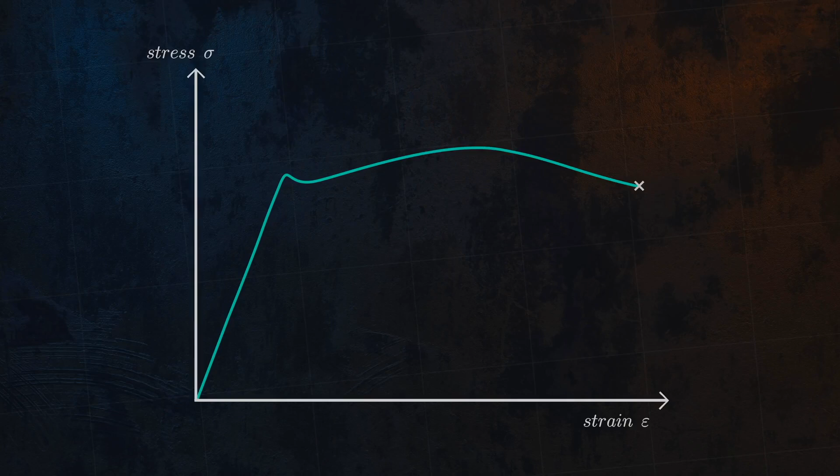As you know, I am discussing with you the course Material Science, and in that I am discussing a subpart, that is mechanical properties of materials. Till now we have discussed up to the hardness property.

Today we are going to discuss a very important thing which is known as fatigue. What is fatigue? In general sense, like a human body, when it gets tired, we say that we are fatigued. Similar is the case with different kinds of materials also.

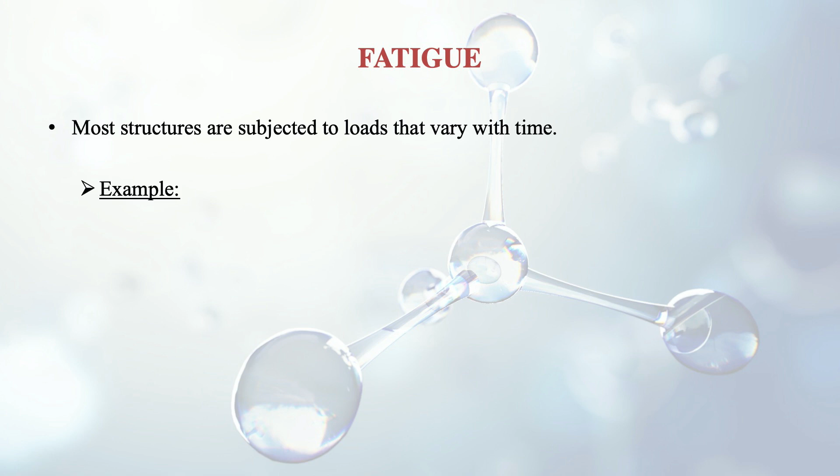Most structures are subjected to loads that vary with time. So it's a dynamic kind of thing. Dynamic means the time factor comes in. Like you have the aerodynamic loads, the wind loading on the buildings, the earth resistance to earth moving machines. All these kinds of loads are dynamic loads which keep on changing with time.

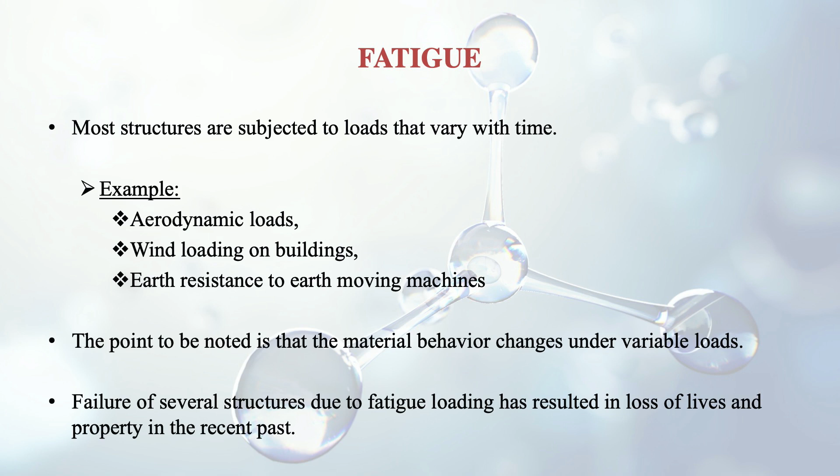The point to be noted is that the material behavior changes under variable loads. Different kinds of properties of the materials and their behavior change upon the variable loads which are varying with time. Failure of several structures due to fatigue loading has resulted in loss of lives and property in the recent past. Such cases have been there, like any bridge failure, or any space shuttle failure. There are certain materials used in these things which may be failing with time and we may not be knowing about them.

Again, why is fatigue so important? Because weakness of the material is going on increasing under varying loads. A stress level at which failure under static condition will not take place is not safe if the stress repeats with respect to time. Failure under static condition occurs at a higher stress level, but if the load is varying, then it occurs at a lower stress level.

Theoretically, there is no stress level for most materials which will be indefinitely safe. In a theoretical sense, there is no such stress level where we can say that beyond this or below this, no failure will take place. However, practically, some safe stress level can be defined and determined for some specified number of cycles. In practical terms, we define a certain stress level below which we say it will be safe even if you increase the number of cycles.

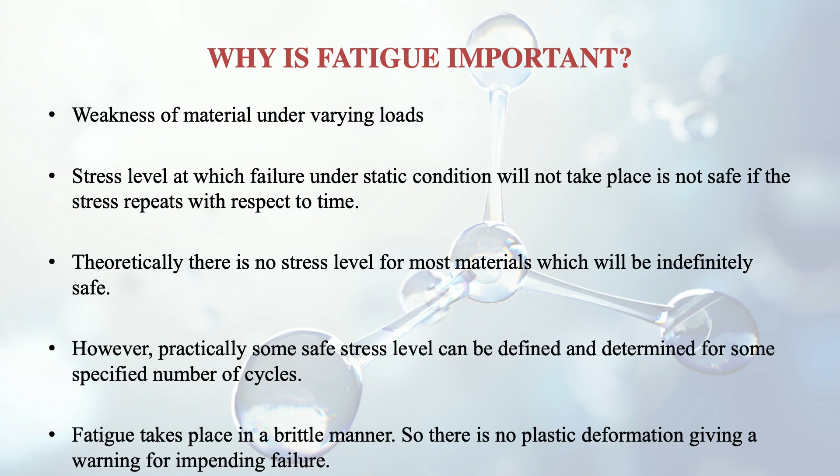Fatigue takes place in a brittle manner, so there is no plastic deformation giving a warning for impending failure. This is a very important thing which we need to know. Brittle fracture, we know, just happens. There is no warning. In case of ductile material, we have seen earlier that necking and all those things take place. But in case of brittle fracture, nothing happens like that. So it is instantaneous. One example of that is the Aloha Airlines flight in the 1980s, where the upper portion of the fuselage broke like that. It was also a kind of fatigue only.

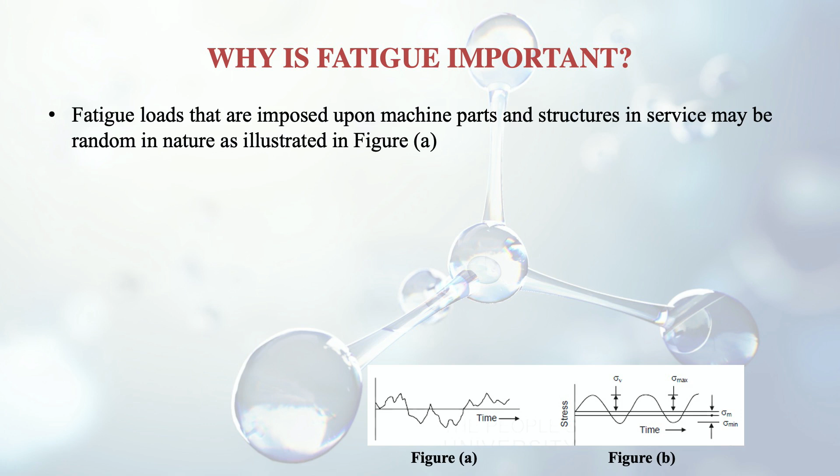Fatigue loads that are imposed upon machine parts and structures in service may be random in nature, as illustrated in the figure given. Here is one graph. You can see that the load is completely random. It is sometimes going towards the positive side, sometimes towards the negative side of the x-axis. Laboratory tests are performed under sinusoidal stresses for convenience. To make this random load a little more convenient for us to see its effect, we use sinusoidal stresses as shown in the figure named B.

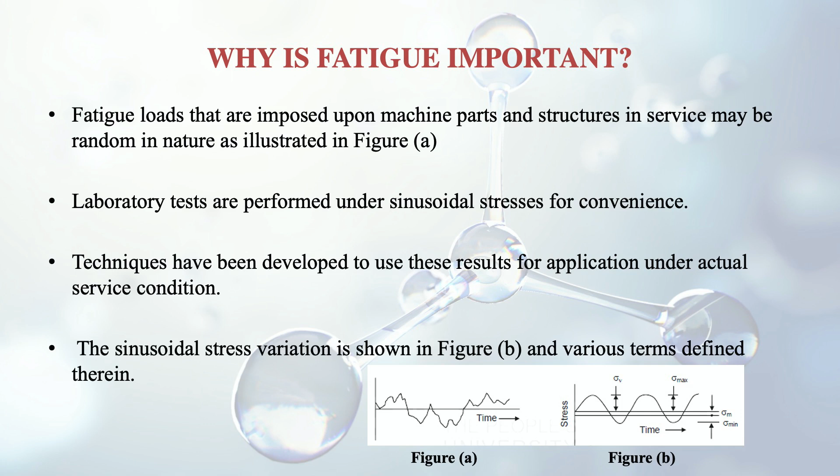Techniques have been developed to use these results for application under actual service conditions. The sinusoidal stress variation is shown in the figures as I mentioned before also. This stress cycle is also termed fluctuating. See, it's fluctuating. Like if the voltage in your house is fluctuating, then the bulb light also fluctuates. This is what fluctuation is. The stress also fluctuates like that.

About 90% of data are collected under a fully reversed stress cycle. Meaning, suppose the stress is on the positive side at some point, then it will be towards the negative and of equal magnitude when the cycle is going forward. This is what reversal of stress is: one time it is completely positive and the other time it is completely negative with the same magnitude, meaning in the opposite direction.

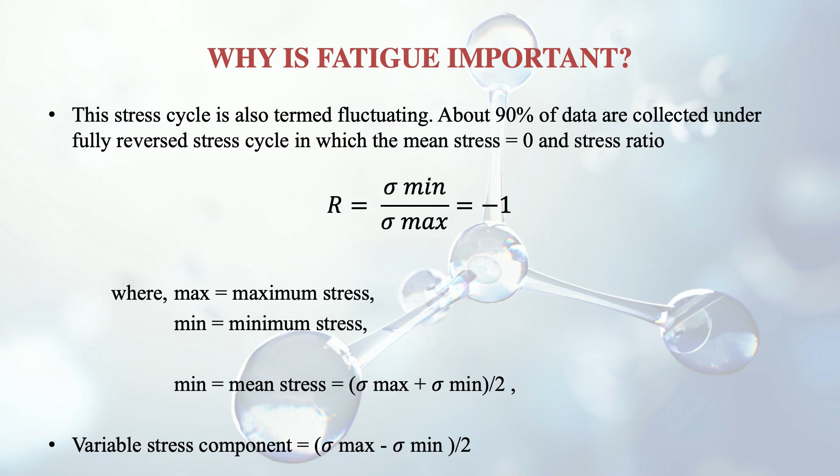So, fully reversed stress cycle is one in which the mean stress is 0 and the stress ratio is given by R, that is sigma minimum upon sigma maximum. Sigma minimum is the minimum stress and sigma maximum is the maximum stress. The mean stress is sigma max plus sigma min divided by 2, and the variable stress component is given by sigma max minus sigma min divided by 2.

Now we discuss the test procedure for fatigue. The applied stress can be of different types - it can be axial, bending, torsion, or their combination, like all these loads we have discussed in our earlier sessions. So in each case a particular type of machine is required. When you have different types of loads, different types of machines are used.

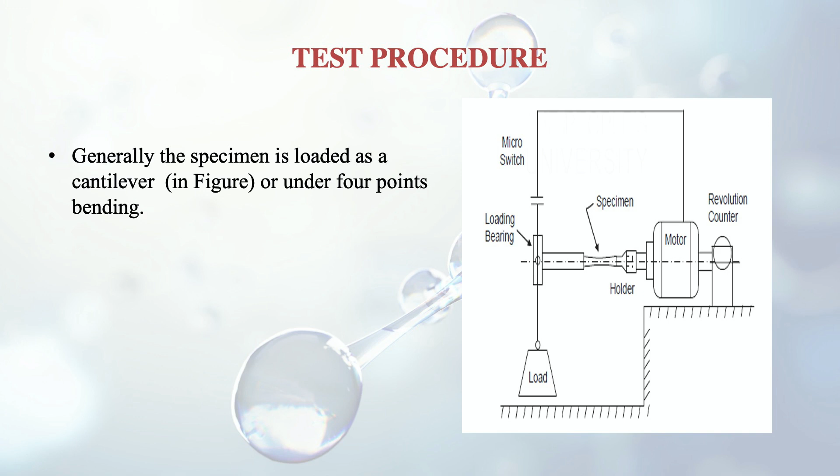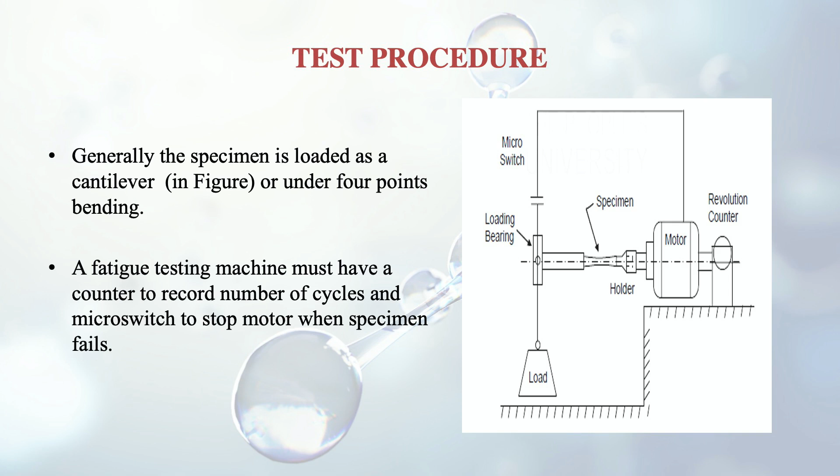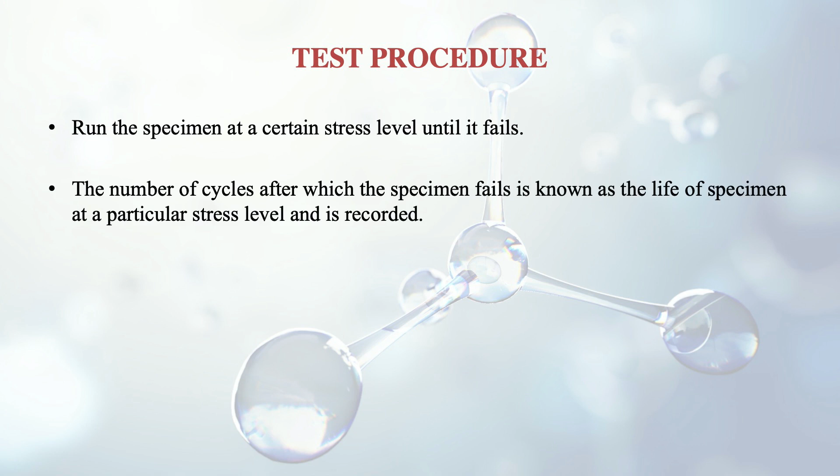A fatigue testing machine must have a counter to record the number of cycles and a micro switch to stop the motor when a specimen fails. So what we need to do is run the specimen at a certain stress level until it fails. The number of cycles after which the specimen fails is known as the life of the specimen at that particular stress level, and is recorded. Thus, a number of observations for stress levels and corresponding number of cycles to failure are obtained.

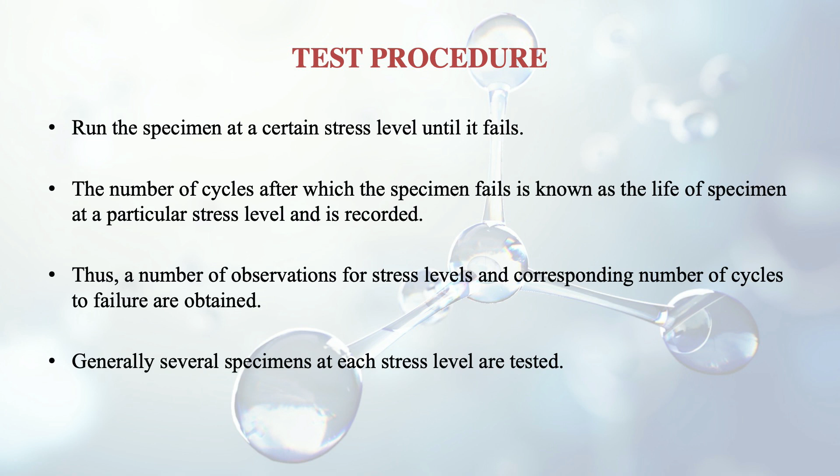Generally, several specimens at each stress level are tested. For obtaining fatigue curves, the stress levels are plotted as ordinates and logarithms of the number of cycles are plotted as abscissa. So this is a curve where stress is on the y-axis and the logarithm of the number of cycles is on the x-axis.

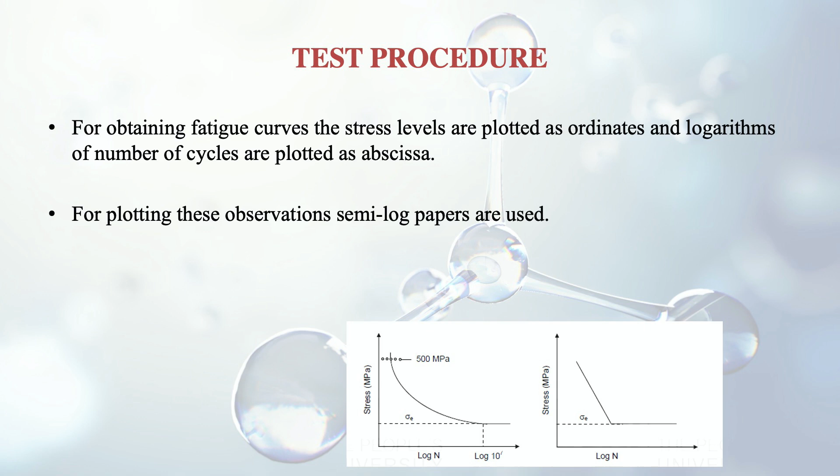Why are we taking logarithmic? Because it gives a certain number - suppose it is 10 to the power 4 cycles, when we take log of that to the base 10, it gives us the number 4. So we can represent it on the scale in a convenient manner, like 1, 2, 3, 4, 5, 6, 7 and so on. For plotting these observations, semi-log papers are used because one axis is log based and the other is simple.

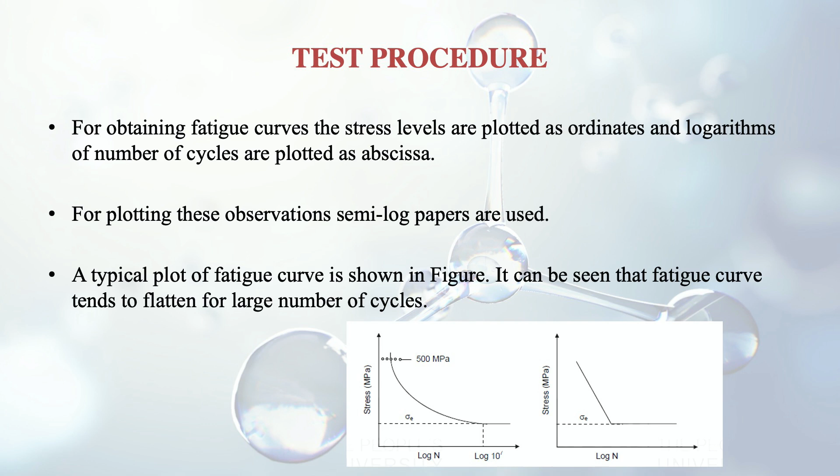A typical plot of the fatigue curve is shown in the figure. It can be seen that the fatigue curve tends to flatten for a large number of cycles, meaning it becomes parallel to the x-axis after a large number of cycles. The highest stress level is so chosen that the number of cycles to failure is around 10 to the power of 4.

The fatigue curve is seldom investigated for cycles less than this, because if we are looking at fatigue, we need a number of cycles. We cannot say, okay, I have done it for 10 or 15 or 20 - no, we need a larger number. So that minimum is around 10 to the power of 4.

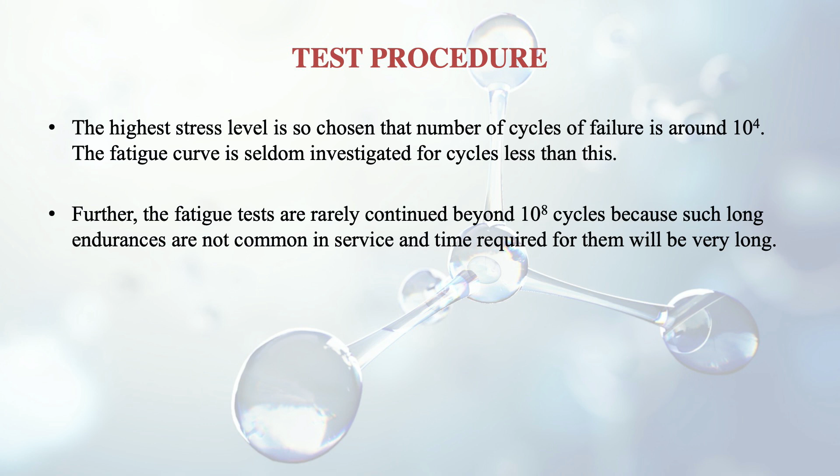Further, fatigue tests are rarely continued beyond 10 to the power of 8 cycles, because such long endurances are not common in service and the time required for them would be very long. If we want to go to 10 to the power of 8 cycles, it will take a very long time - the fatigue testing will require a very long time and it will not be practical for us. We don't need to go to such a large number of cycles as 10 to the power of 8.

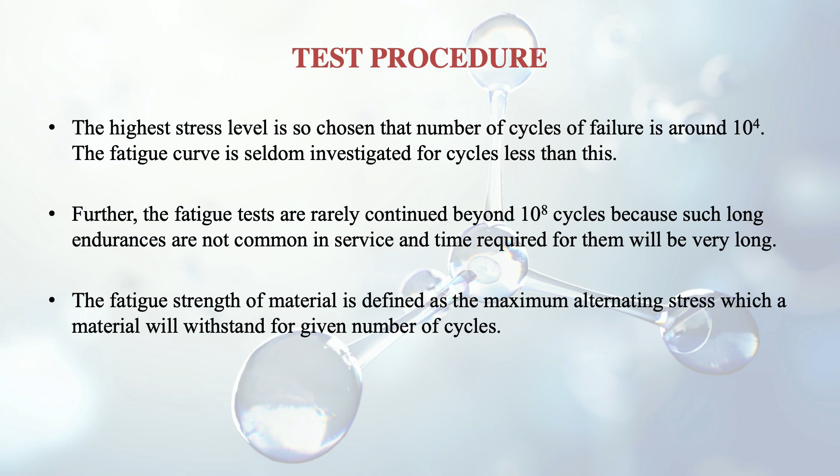The fatigue strength of a material is defined as the maximum alternating stress which a material will withstand for a given number of cycles. This number of cycles is mostly taken at 10 to the power 7 cycles, except in some special cases. It is to be noted that whenever fatigue strength is described, the corresponding number of cycles must also be mentioned - fatigue strength without mentioning the number of cycles has no meaning, because it's dependent on the dynamic type of loading.

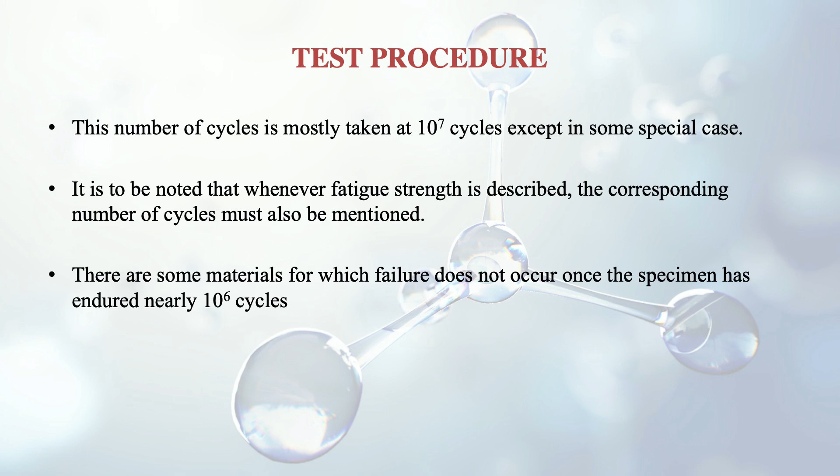There are some materials for which failure does not occur once the specimen has endured nearly 10 to the power of 6 cycles. That's why it is a standard that if a specimen has already endured 10 to the power of 6 cycles without failure, then we take it as such that this material is now not going to fail.

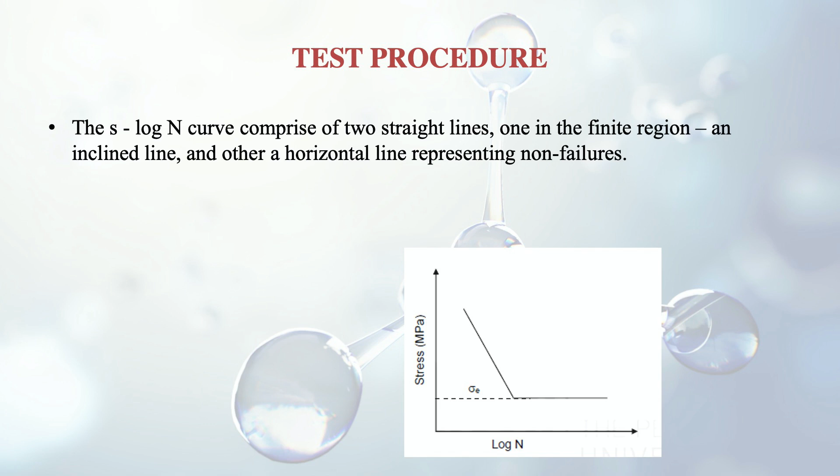This S-log-N curve comprises two straight lines, as I told earlier: one in the finite region, an inclined line, and the other a horizontal line representing non-failure. This is for mild steel. We can see it is always a straight line in case of mild steel, whereas it was curved for other materials. The stress at which the curve becomes horizontal is known as the fatigue limit or endurance limit.

So now we will discuss the mechanism of fatigue. How does this fatigue happen? Final failure in fatigue is due to extension of a crack to a critical value at which the uncracked portion is so small that the specimen cannot sustain stress and hence fractures.

Suppose I have a small hole of say 1 millimeter diameter, and due to fatigue it becomes larger, 2 millimeter, further 6 millimeter, 8 millimeter, and it goes on again and again. Finally it reaches a point where the uncracked material is very less, so it will rupture. This is the mechanism in fatigue, where a small crack goes on increasing in dimension and becomes bigger as dynamic load is applied on it.

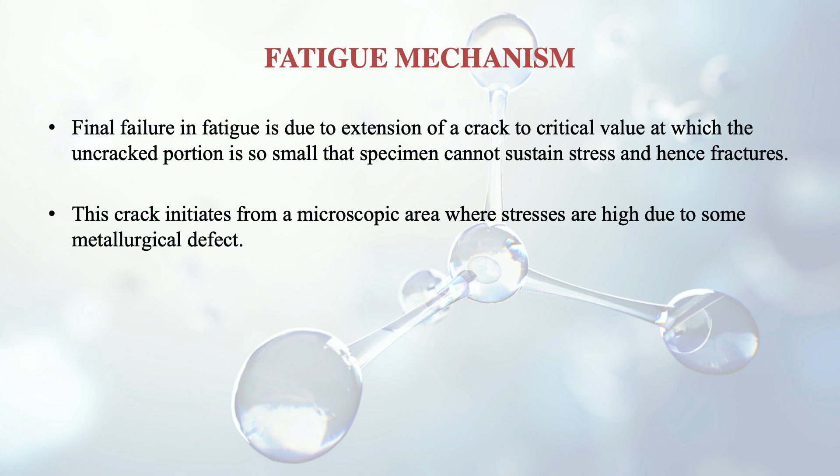This crack initiates from a microscopic area where stresses are high due to some metallurgical defect. Stresses can be high in that region even if the crack is small, due to the metallurgical defect. There are various kinds of metallurgical defects, which is why manufacturing defects and metallurgical defects are important.

Due to high stress at any point in a crystalline material, localized yielding takes place, resulting in slip in the direction of maximum shearing stress. So slip happens, and shearing stress causes this crack to grow. As stress cycling continues, the slip causes very minute cracks to generate, which keep growing slowly and progressively with increasing number of cycles, as I explained earlier.

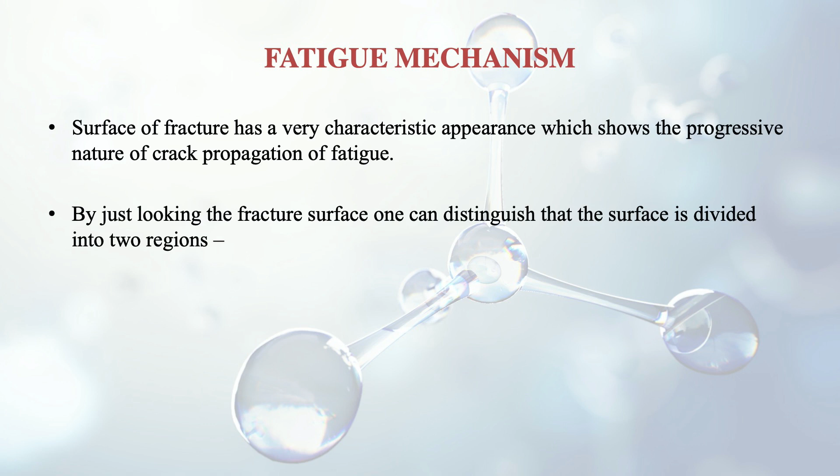The surface of fracture has a very characteristic appearance showing the progressive nature of crack propagation in fatigue. Mostly it's on the surface that fatigue starts. By just looking at the fracture surface, one can distinguish it is divided into two regions: one smooth and the other rough and jagged.

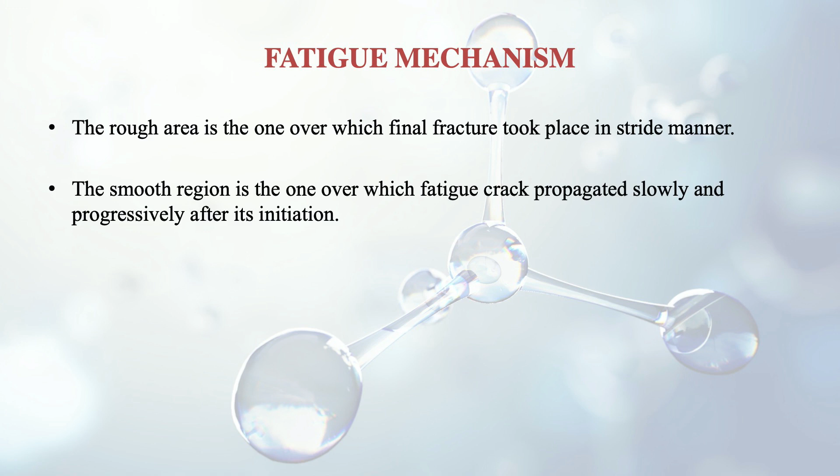If you take a specimen that was under fatigue, you can make out from the surface itself that one region is very smooth and the other is rough and jagged. The rough area is where final fracture took place in a sudden manner. The smooth region is where the fatigue crack propagated slowly and progressively after its initiation. So the rough area is where fracture takes place, and the smooth one is where it propagates slowly. The two cracked faces remain in contact.

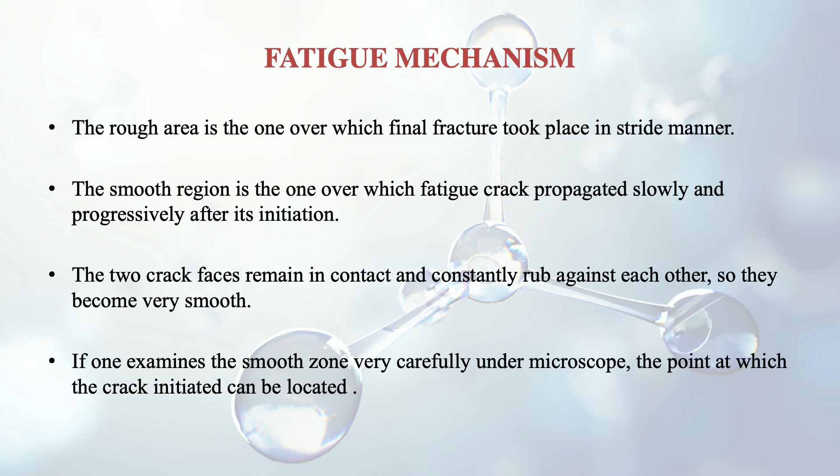If one examines the smooth zone carefully under a microscope, the point at which the crack initiated can be located. From the smooth zone viewed under a microscope, we can get the point from which this crack initiated. Marks like beach markings in the form of conchoidal rings, somewhat like concentric circles, spread out from that point.

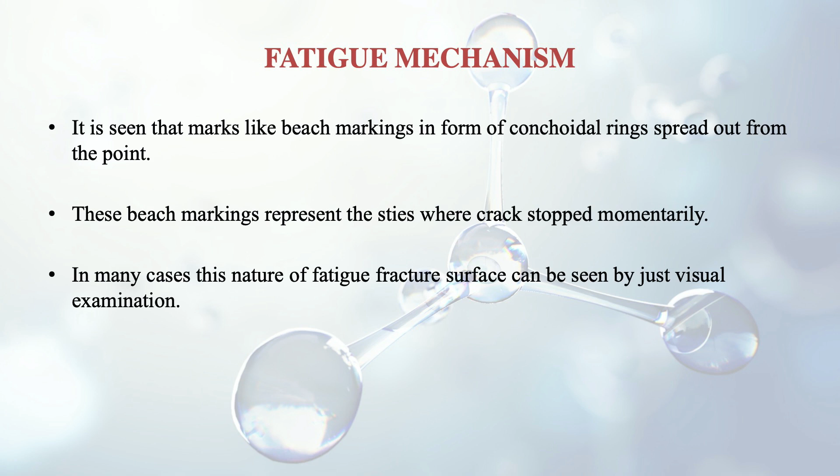These beach markings represent the sites where the crack stopped momentarily. In many cases, this nature of fatigue fracture surface can be seen by just visual examination. Under high power microscopes, the region between two conchoidal rings has been examined to show similar rings, which are the sites where the crack stopped after each cycle. We study this with high power microscopes because only then can we differentiate between two conchoidal rings.

The total number of cycles to failure, as recorded, has been found to coincide with the number of conchoidal marks. So these conchoidal marks give us the total number of cycles, which is why the study of these conchoidal marks is very important.

That's why you use the high power microscope to know about the number of cycles, because they are exactly similar to the number of cycles of loading. So here is the figure that shows the characteristic fatigue fracture surface. The proportionate area of any one zone is indicative of the level of stress. That is, if a smooth zone is much larger than the rough zone, it indicates that the stress level was low, and vice versa. And if the smooth area is lesser, then it means that the stress level was quite high.

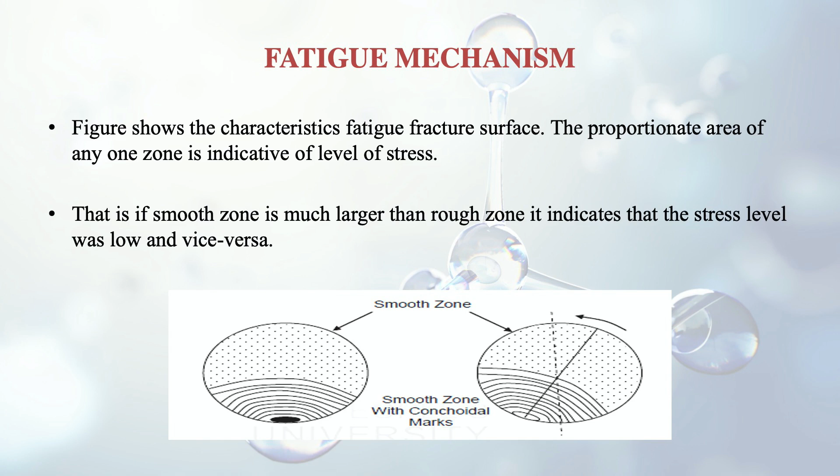Here in the figure you can see the smooth zone and the rough zone. There are conchoidal rings also. If there are several points of crack initiation, it indicates that some geometrical stress concentration on the surface was present. So suppose there are several points of cracks, or a number of small cracks, then that means that this specimen was subjected at that place to a very high stress concentration.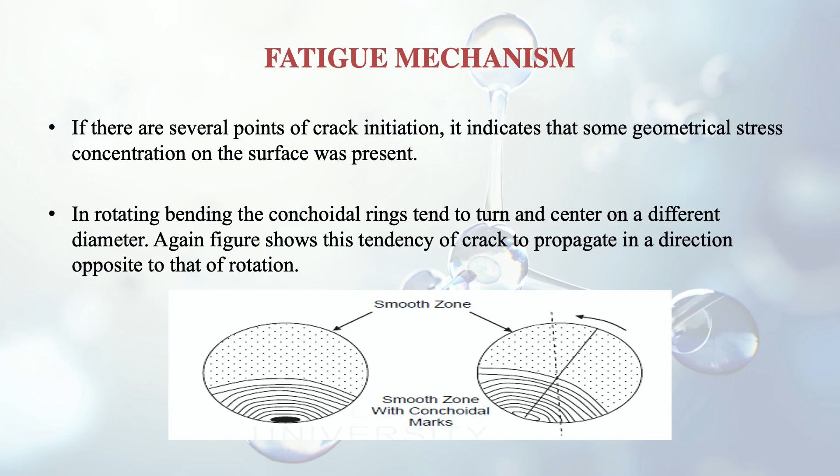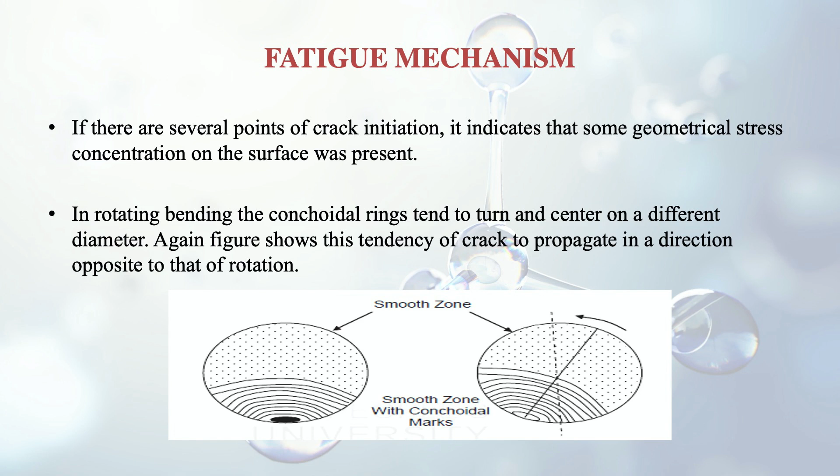In rotating bending, the conchoidal rings tend to turn and center on a different diameter. So if it is on a certain axis, then it turns and takes up a different diameter. It is shown in the figure, the tendency of the crack to propagate in a direction opposite to that of the rotation. Now we discuss the statistical nature of fatigue.

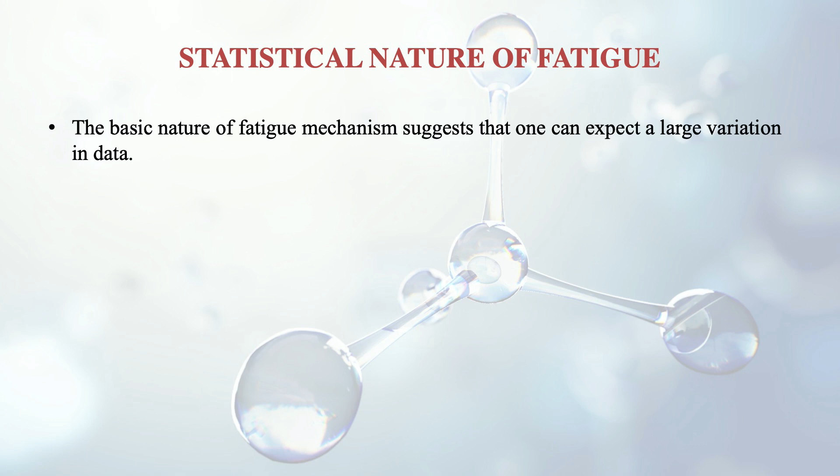So the basic nature of the fatigue mechanism suggests that one can expect a large variation in data. The initiation of a crack at a point in the material depends upon a suitable combination of highest stress concentration due to local defect and level of stress, along with a larger number of cycles. It is never certain after how many cycles a crack will initiate and then become unstable to cause fracture. So we never know how many cycles we need for a crack to go up to the rupture point. So it's a guess type of work, iterative type of work. These events eventually depend upon the distribution of defects, which is highly statistical in nature. That's why we are discussing the statistical nature of fatigue.

On testing several specimens at a particular stress level, all of them fail at a different stress. So suppose there is a specimen and you are testing it at a particular stress level, then all of them may be failing at a different stress. We have defined a certain stress level, but some plus or minus is there in every case. So this will be true of any other stress level as well. This creates difficulty in analyzing fatigue, for example, in plotting the stress versus log N curve. So how will we plot the curve? Because we don't know at what stress level we can say is the endurance limit.

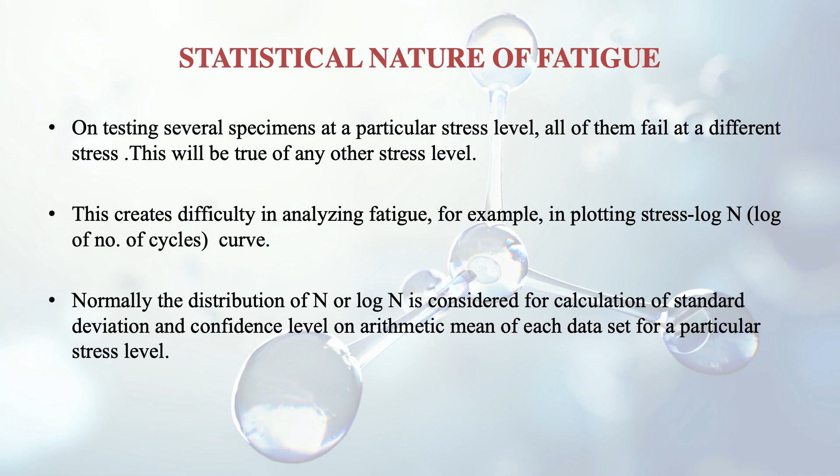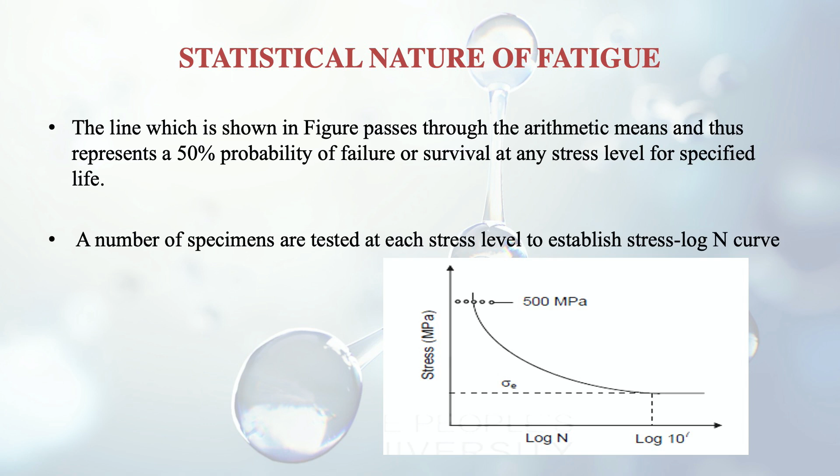Normally the distribution of N or log N is considered for calculation of standard deviation and confidence level on the arithmetic mean of each data set for a particular stress level. So we generally take the plus or minus around a particular stress level, and we take the mean of that to determine at what stress level it is going to fail, or what will be the endurance limit. So in the figure you can see the line which is shown passes through the arithmetic means and thus represents a 50% probability of failure or survival at any stress level for a specified life. A number of specimens are tested at each stress level to establish the stress versus log N curve.

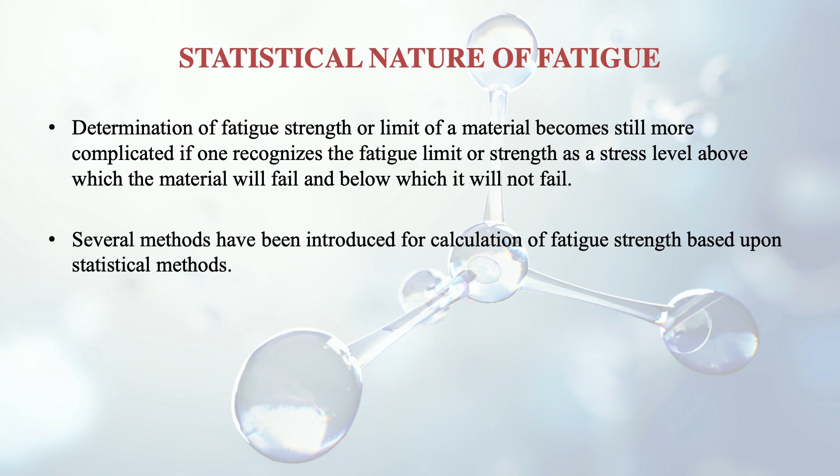So determination of fatigue strength or limit of a material becomes still more complicated if one recognizes the fatigue limit or strength as a stress level above which the material will fail and below which it will not fail. So it is quite difficult to determine this fatigue strength limit of the material. Several methods have been introduced for calculation of fatigue strength based upon statistical methods. Thus we have got different statistical methods. Those statistical methods I am not discussing here. You can read from your material, and for any queries please address them to me.

And now we discuss the factors affecting fatigue behavior. Fatigue strength is the most important property that is governed by fatigue behavior. Fatigue life at a given stress level may also be regarded as a fatigue property. Increased fatigue strength and increased life at a given stress mark improvement in fatigue behavior. So obviously, if there is increased fatigue strength and increased life, then it is better, because then it can take up more varying types of loads, and its endurance limit will increase.

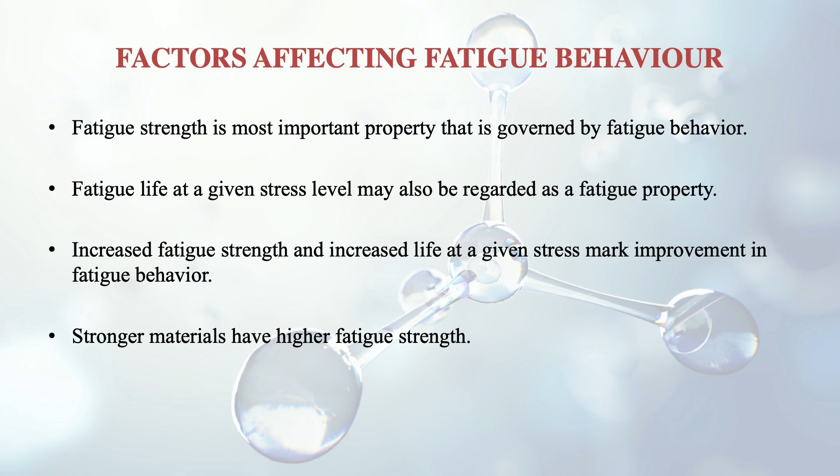The stronger materials have higher fatigue strength. Half of the ultimate strength in tension is equal to the fatigue strength obtained from a smooth polished specimen in a rotating bending machine for steel.

It is seen that generally half of the ultimate strength in tension is equal to the fatigue strength for the stronger materials. If a stress cycle is pulsating, the fatigue strength is 40% higher, and if reversible axial stress is applied, the fatigue strength is 15% lower. So reversible axial stress is much more dangerous in one sense than the pulsating type of stress, because the fatigue strength is very much lowered in case of reversible axial stress.

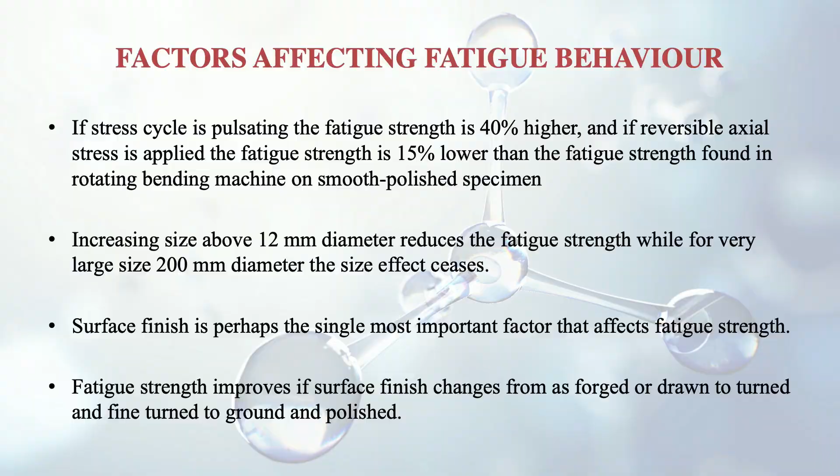Surface finish is perhaps the single most important factor that affects the fatigue strength. So the most important factor which is going to affect fatigue strength is surface finish. Fatigue strength improves if surface finish changes from as forged or drawn to turned and fine turned to ground and polished. So this is the variation, fatigue strength increasing as we are increasing the surface finish.

The forged one is the most crude one, then we go on to the turned one, and finally the fine turned, ground, and polished one. So this gradual scale is going towards more finished specimens, except in a few cases where the inside of the material has a defect, the fatigue crack initiates from the surface. So it is mostly a surface phenomena. Only exceptions are there where the crack may start from inside the material.

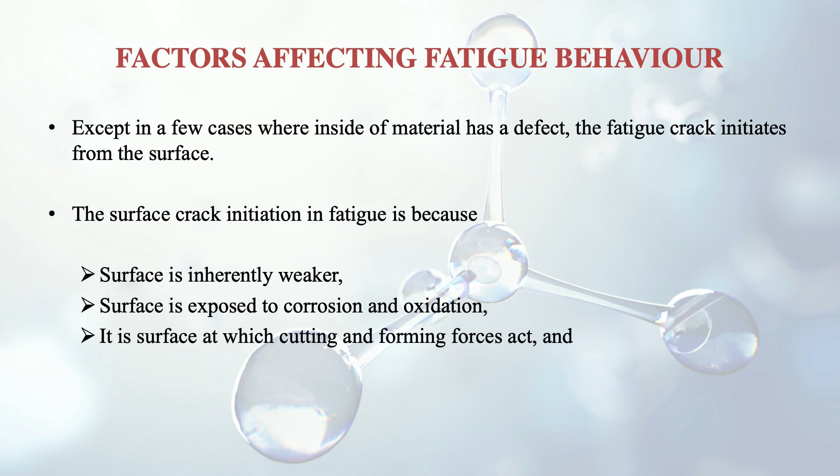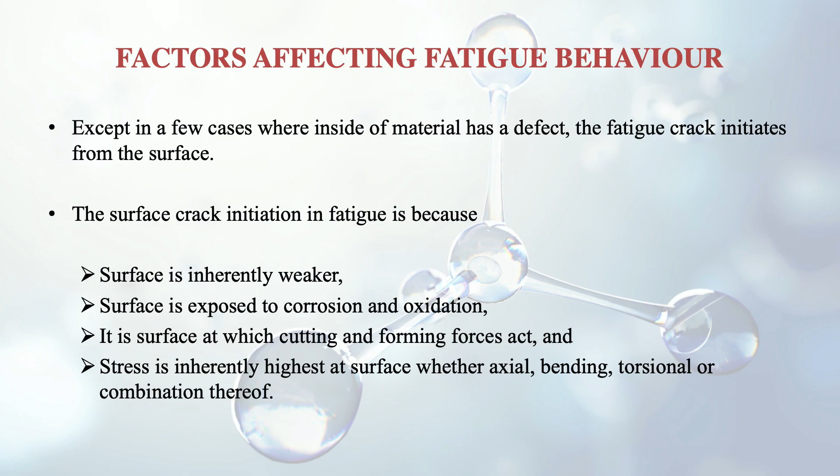So the surface crack initiation in fatigue is because surface is inherently weaker, surface is exposed to corrosion and oxidation, it is the surface at which cutting and forming forces act, and stress is inherently highest at the surface, whether axial, bending, torsional, or combination, whatever it is. So we see here that it depends on the surface how the fatigue failure will take place or how the crack will propagate. Practical applications place some stress concentration on the surface.

Corrosion and high temperature damage the surface. Good surface finish and surface mechanical and heat treatments like shot peening, surface rolling, carburizing, nitriding, cyaniding - all these things, which you will be studying further when we discuss ferrous alloys in upcoming lectures. So these are certain processes, heat treatment processes, that help obtain improved fatigue properties.

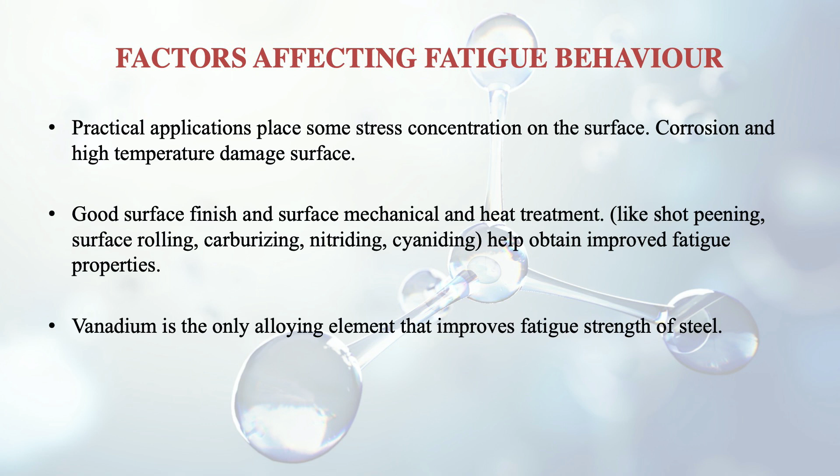Vanadium is the only alloying element that improves fatigue strength of steel. So the only element that improves the fatigue strength of steel is vanadium, nothing else. Only vanadium we can alloy.

So further now we discuss material problems at elevated temperatures. Most materials lose their strength at higher temperatures, the reason being greater mobility of atoms at high temperatures. As I discussed earlier, if the molecules inside the material are close enough, or compact, it has got greater strength or greater hardness. Similarly, if temperature is applied, they start moving away from each other, so the strength goes down.

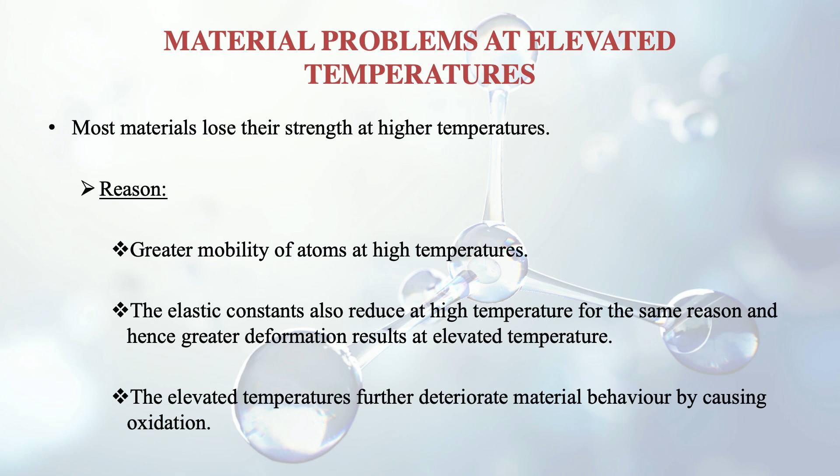The elastic constants also reduce at high temperatures for the same reason, and hence greater deformation results at elevated temperature. Elevated temperatures further deteriorate material behavior by causing oxidation, a phenomena where a certain layer is formed which can harm the surface of the material. So there is a demand for high temperature resistant materials.

Why are we studying this temperature effect? Because nowadays we see huge demand for high temperature resistant materials as we are using them at different places. Like there is constant demand from high technology applications involving nuclear engineering, steam and gas turbines, high pressure boilers, oil technology, transportation engineering - so many fields are there.

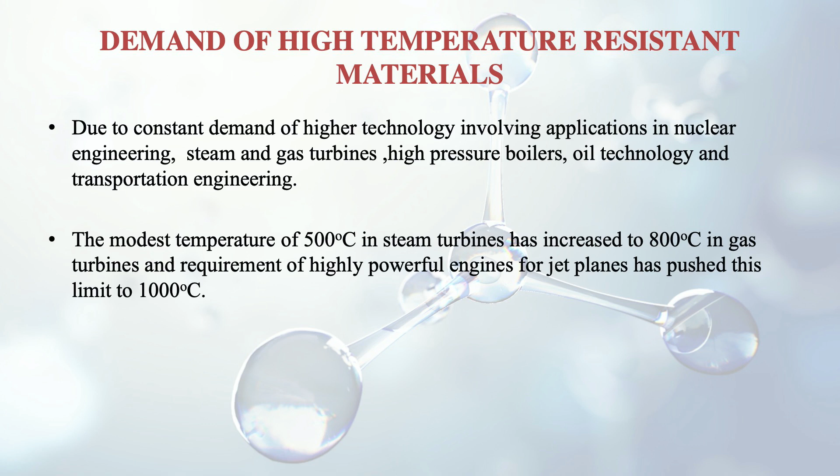The modest temperature of 500 degrees centigrade in steam turbines has increased to 800 degrees centigrade in gas turbines. So we require material accordingly, otherwise it will not work at 800 degrees centigrade. And the requirement of highly powerful engines for jet planes has pushed this limit to 1000 degrees centigrade. So high temperature resistant materials are very much required.

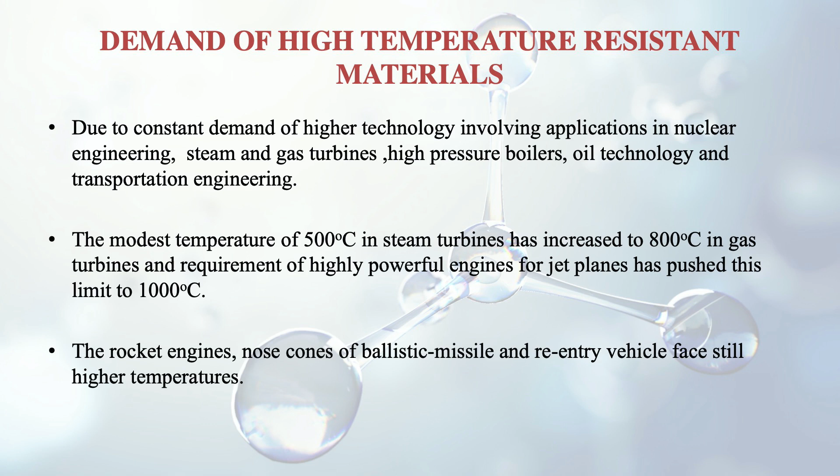The rocket engines, nose cones of ballistic missiles, and re-entry vehicles face still higher temperatures. We know that when those space shuttles are coming back into the atmosphere, the temperature is very high. They can fail if the material is not of a category which can withstand those high temperatures.

While static properties of materials are not much affected by the time required for testing at room temperatures, the strain rate affects high temperature properties greatly.

So we have studied strain rate in the previous sessions, and it does affect the high temperature properties. It is characteristic of high temperature properties that the time element becomes important for them. Particularly important because a static load much below the yield load of a material could result in gradual deformation at elevated temperature. So even when we haven't reached the yield point in the stress strain diagram, this deformation can start taking place because of the high temperature. So plastic deformation can start even before that. So it's very important to study the high temperature effect.

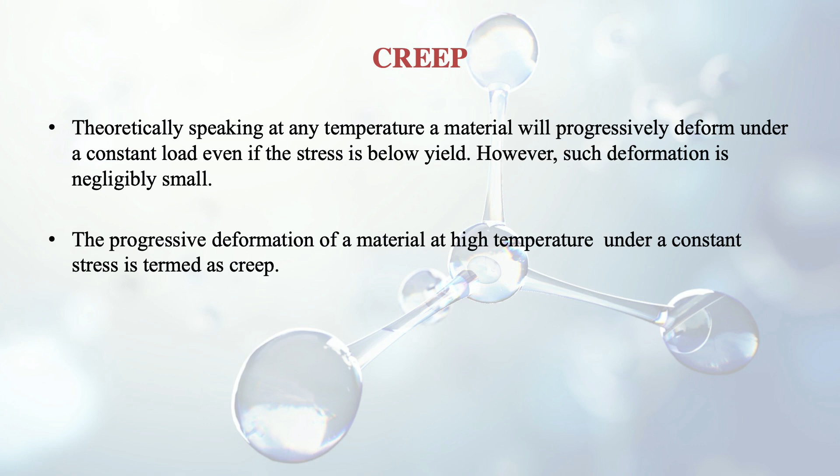To study these high temperature effects, there is a property which we need to know, that is known as creep. So theoretically speaking, at any temperature, a material will progressively deform under a constant load even if the stress is below yield. However, such deformation is negligibly small. The progressive deformation of a material at high temperature under constant stress is termed as creep. So this is the definition of creep.

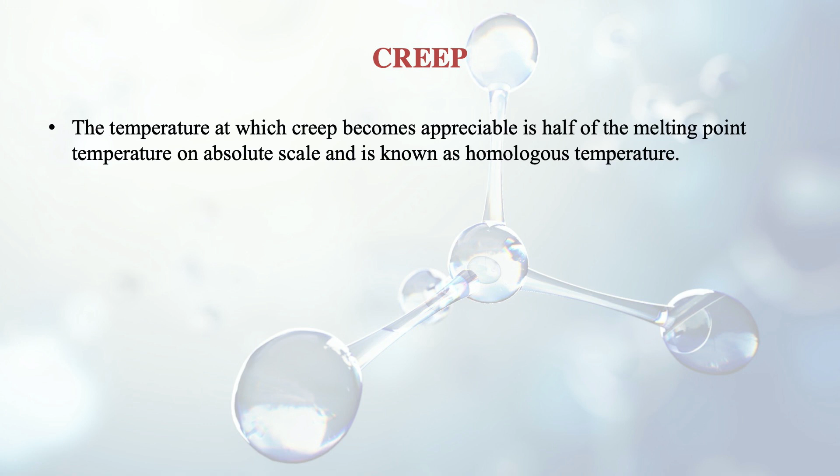What will happen is that there will be a progressive deformation of the material at high temperature under a constant stress. That stress may be lower than the yield point stress. Creep can become quite appreciable depending upon the combination of temperature and stress. So creep is dependent on both temperature as well as stress. The deformation of material in the laboratory is mostly measured as a strain suffered by the tension specimen. So when we do laboratory tests, we do it in terms of strain only. The temperature at which creep becomes appreciable is half of the melting point temperature on the absolute scale and is known as the homologous temperature.

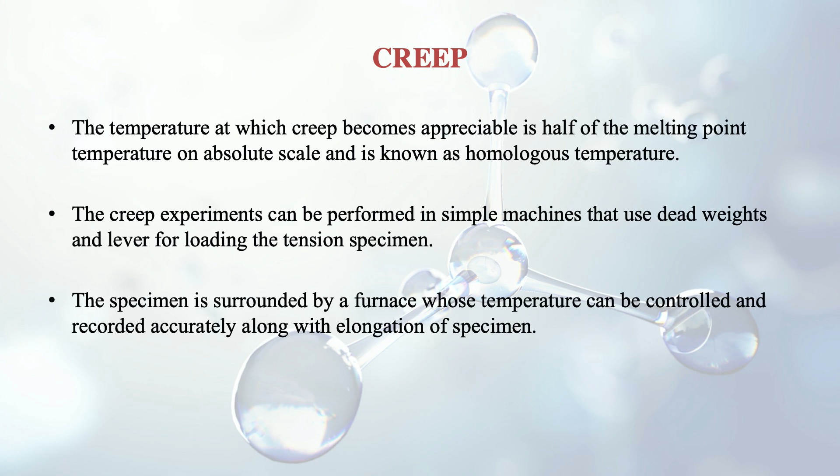The creep experiments can be performed in simple machines that use dead weights and a lever for loading the tension specimen. So there are machines in which the specimen is placed inside a furnace and a certain temperature is given, or the temperature is raised, with a similar kind of setup as in the simple tension test. The additional thing is that we have a furnace also to raise the temperature to different levels. Then load is applied at one end, and through that the load will act on the specimen, and the temperature will also be raised. So we will see what will be the effect on the specimen due to these various loads and temperatures. You can get the figure from any site on the internet for that. And the specimen is surrounded by a furnace, as I told you, whose temperature can be controlled and recorded accurately along with the elongation of the specimen.

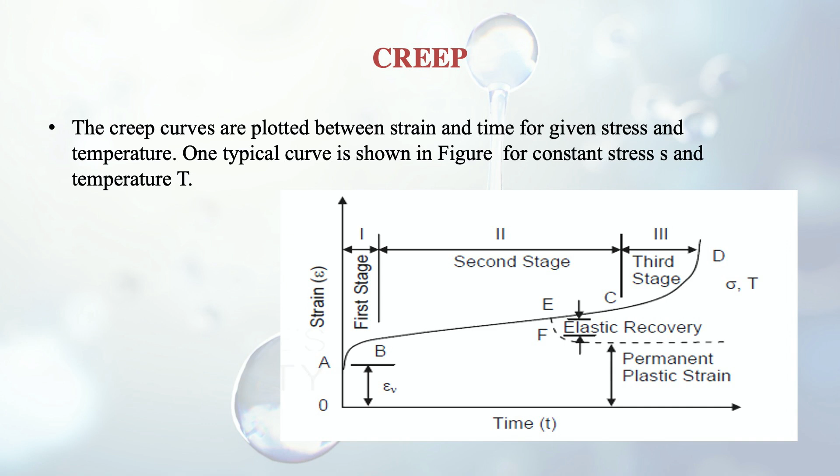So now we are going to discuss a very important curve which is known as the creep curve, and we need to understand this. The creep curves are plotted between strain and time. Like I told you earlier, generally in the laboratory strain is measured. So this is a curve between strain and time for given stress and temperature. So the stress is constant and the temperature is constant. The variables are the strain and the time. One typical curve is shown in this figure for constant stress S and temperature T.

So the specimen is loaded at a certain point, say O. O is the origin, and it corresponds to 0 strain and 0 time. Immediately after the application of stress, the specimen suffers elastic strain up to point A. So OA, you see, is elastic strain. So whenever you remove the load from here, it will come back to its origin. That means the strain can be fully recovered. As time passes, it is now a time dependent thing also. Time comes in, time will pass, and the specimen continues to extend with decreasing rate up to point B. So now the rate of extension has gone down and it will continue up to the point B.

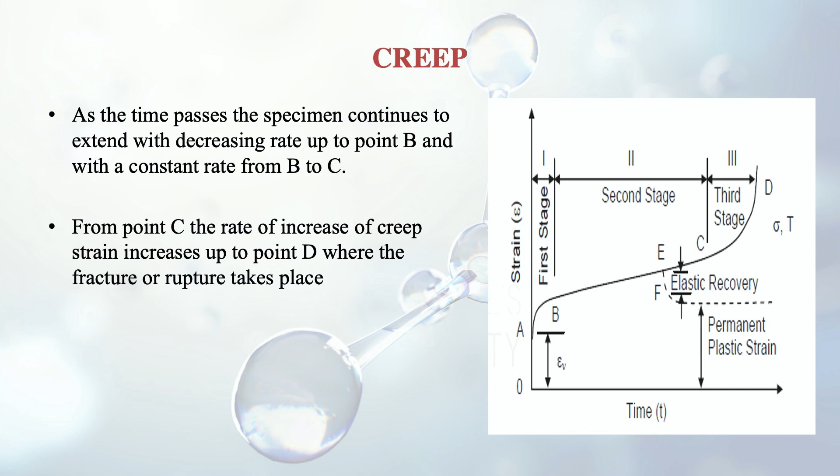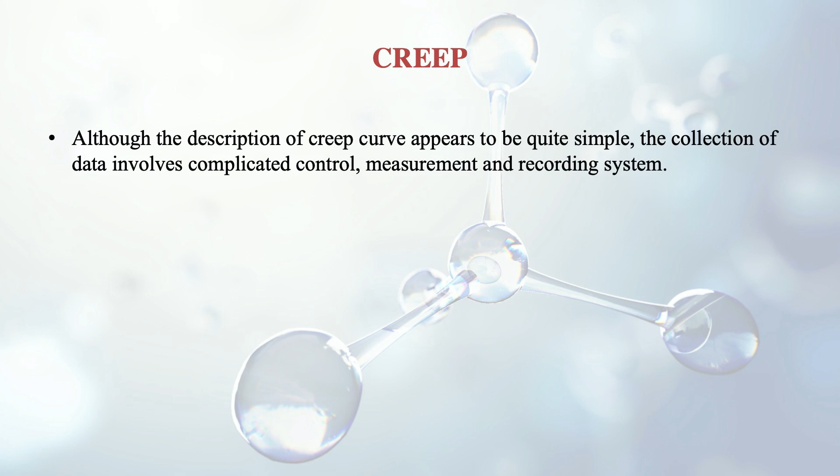And further, when we move from the point B, the rate will become constant and it will remain as such from B to C. That means the rate of extension will be constant. That means the line will have a constant slope as shown in the figure. From point C onwards, the rate of increase of creep strain increases up to point D, where the fracture or rupture takes place. So this is the whole thing. It is divided into 3 portions, which I am now discussing with you. So here you can see the creep curves are plotted between strain and time for given stress and temperature. There are 3 phases here. Although the description of the creep curve appears to be quite simple, the collection of data involves complicated control, measurement and recording systems.

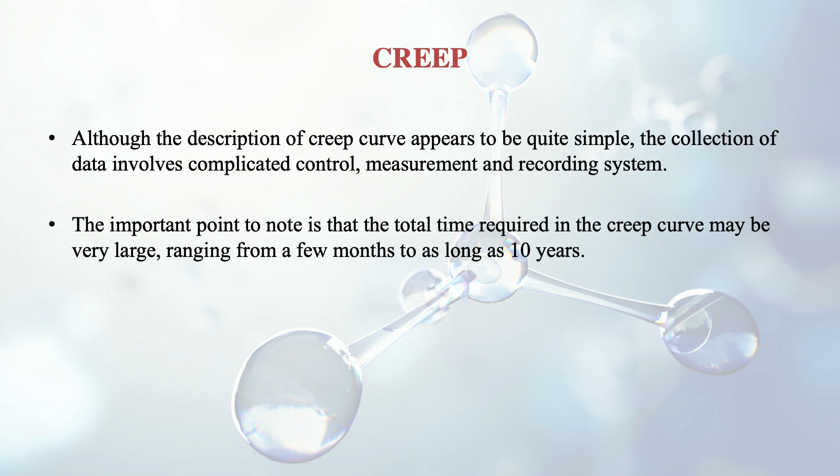So as such, when we see that, it seems very simple that with time and temperature this elongation is taking place, but this time is actually a very long time, and it becomes very complicated to do such type of experiments. The important point to note is that the total time required in the creep curve may be very large, ranging from a few months to as long as 10 years. So we will have to wait up to 10 years. The instruments are supposed to be working throughout this time. Generally, a battery of machines is required to make simultaneous studies at different temperatures and stress levels.

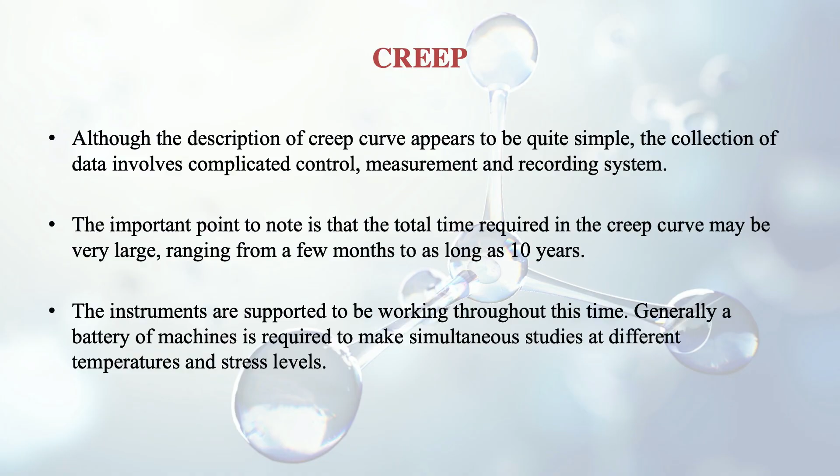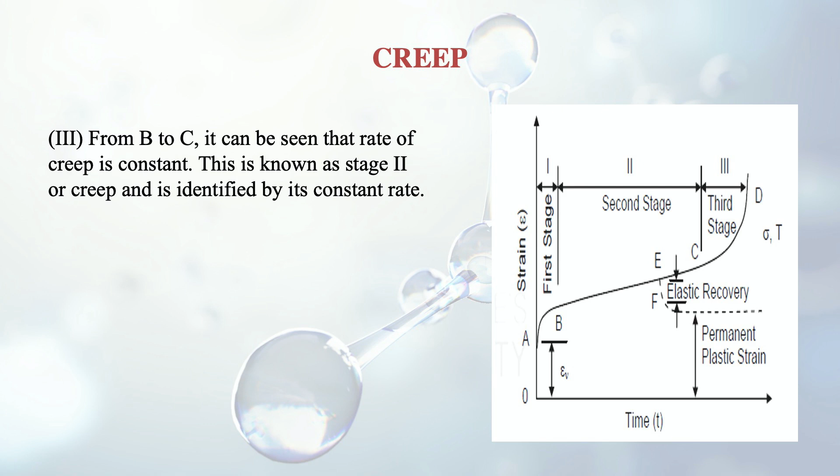From B to C, it can be seen that the rate of creep is constant. As I told earlier, the slope of the line is constant, and so it is a linear one. This is known as stage 2 or steady state creep, and is identified by its constant rate. During this stage, the minimum constant creep rate is attained. This steady state creep is the result of a balance between 2 effects. So why is it happening like this? Now we are understanding. There are 2 effects. One is the strain hardening, and the other one is the softening due to temperature. In the earlier case, from A to B, only strain hardening was taking place, whereas in this case, strain hardening is taking place, but it is being compensated by the softening due to the temperature.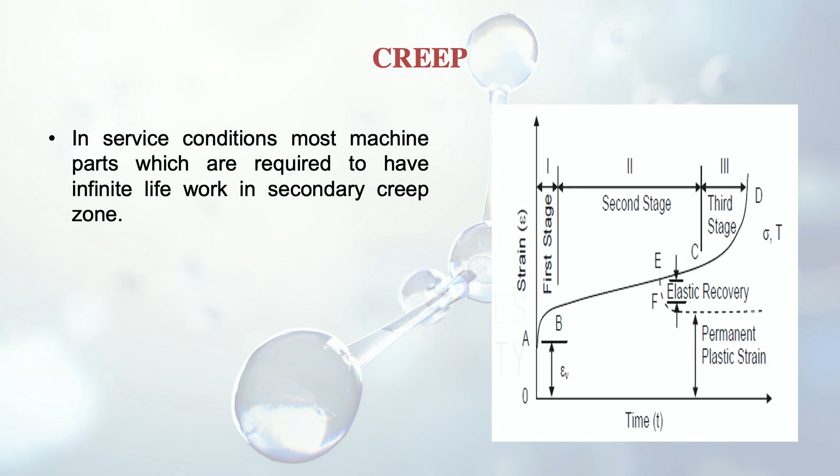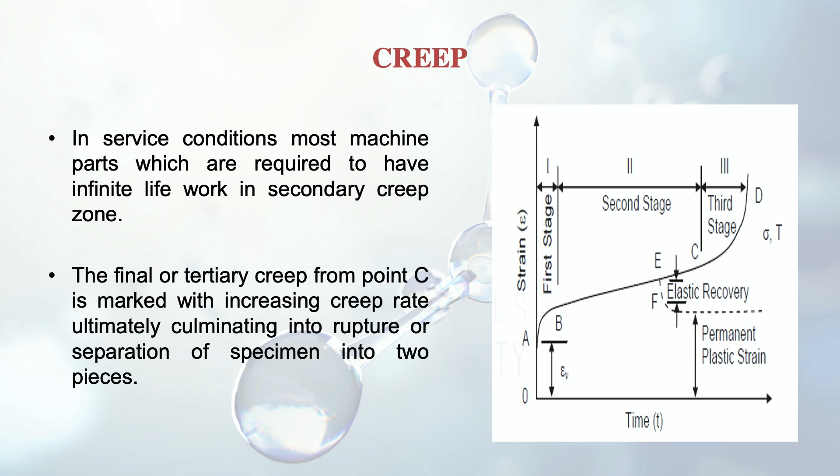In service conditions, most machine parts which are required to have infinite life work in the secondary creep zone. The final or tertiary creep from point C is marked with an increasing creep rate, ultimately culminating in rupture or separation of a specimen into 2 pieces. So finally we reach the rupture point. It may be pointed out here that during tertiary creep, necking also takes place, like we had seen in the simple tension test. So here also necking takes place, which increases effective stress, and thus the rate of strain also increases.

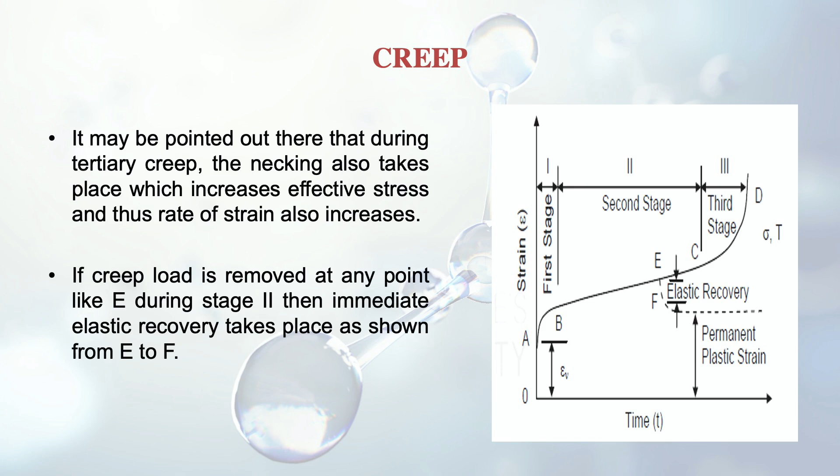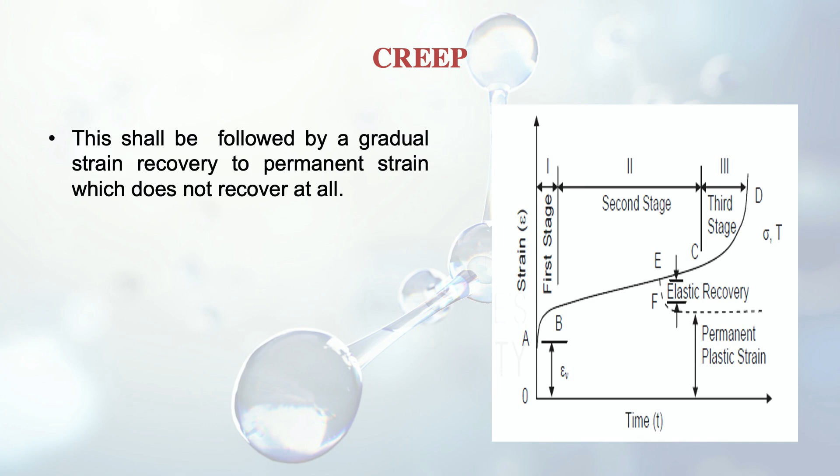If the creep load is removed at any point like E during stage 2, then immediate elastic recovery takes place, as shown in the figure from E to F. So elastic recovery again takes place if the load is removed at point E, but it is not complete recovery like it was from the region O to A. This shall be followed by a gradual strain recovery to a permanent strain, which does not recover at all.

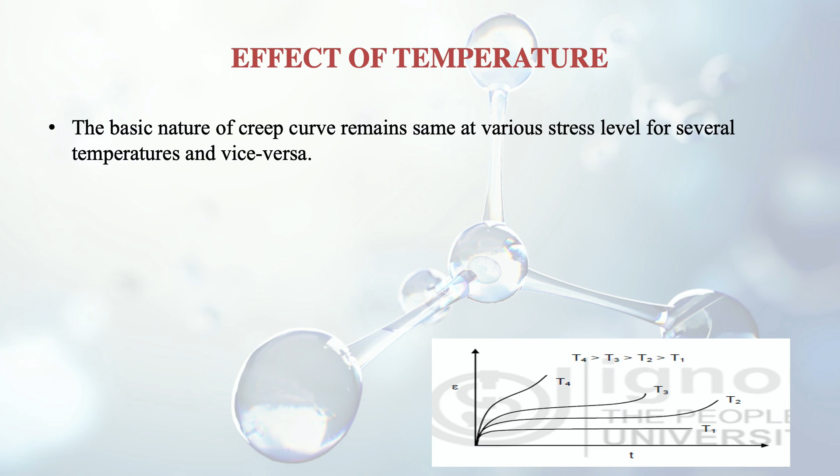So now we discuss the effect of temperature on creep. So temperature has an effect on the creep as well. The basic nature of the creep curve remains the same at various stress levels for several temperatures and vice versa. So the type of creep curve will remain the same whether the stress is different or the temperature is different. However, the higher the temperature, the higher will be the creep strain for the same stress level and time lapse. So if the stress level is maintained at a certain point and temperature is varying, you can see from the figure that this strain is increasing. Strain is going on increasing because it is the curve between the strain and the time.

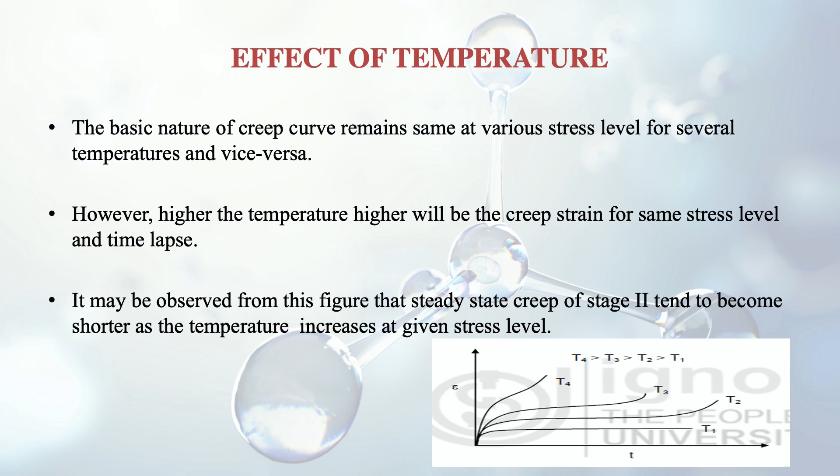It may be observed from this figure that the steady state creep of stage 2 tends to become shorter as the temperature increases at a given stress level. So from the figure it is quite obvious that the second stage is decreasing as we go up to higher temperatures for the same stress level. Similar is the case when we have different stress levels. Earlier we had different temperatures. Now we have different stresses at the same temperature, suppose. So for a given temperature and same lapse of time, creep strain will be higher again at a higher stress level. It may be observed from the figure that the steady state creep of stage 2 tends to become shorter as the stress increases at a given temperature. So the same case again here is that if the stress is going higher at a given temperature, then stage 2, which we have seen earlier, of the 3 stages of the creep phenomena will become shorter.

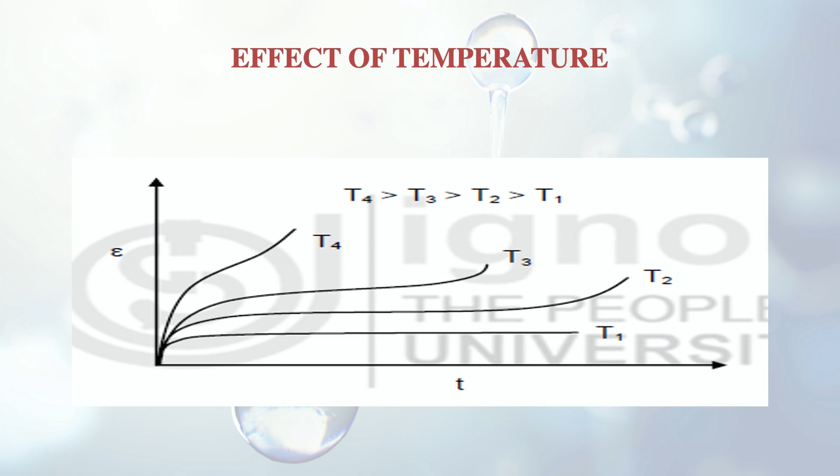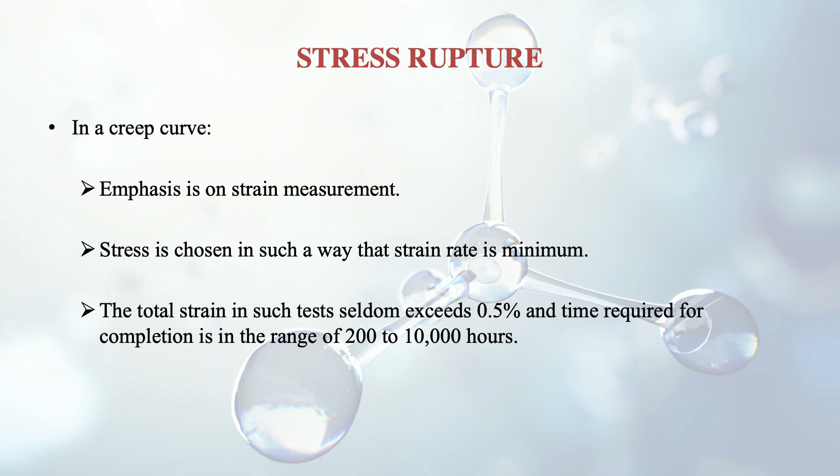In a creep curve, emphasis is on the strain measurement. Like we saw earlier, a strain versus time curve was there. The stress is chosen in such a way that the strain rate is minimum. The total strain in such tests seldom exceeds 0.5%, and the time required for completion is in the range of 200 to 10,000 hours. So you can see the time range is quite large, but the strain is quite less.

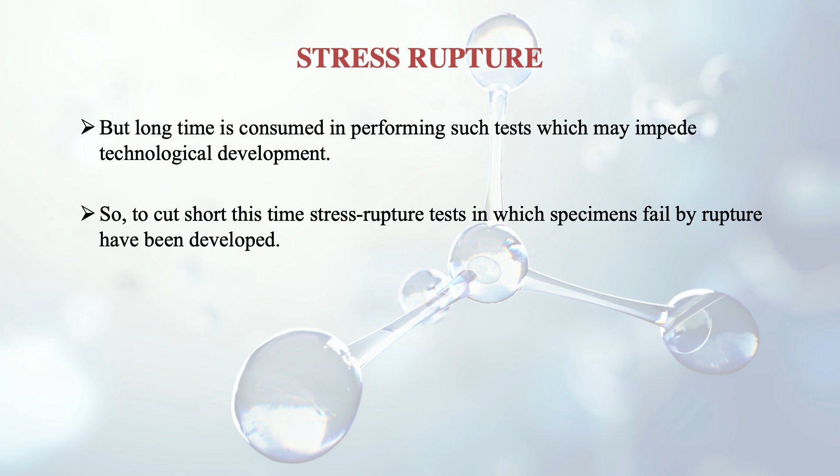So our goal is to tolerate the creep deformation and prevent rupture. We can tolerate the creep deformation, but the material should not go up to the rupture point. But a long time is consumed in performing such creep tests, which may impede technological development. So to cut short this time, stress rupture tests, in which specimens fail by rupture, have been developed.

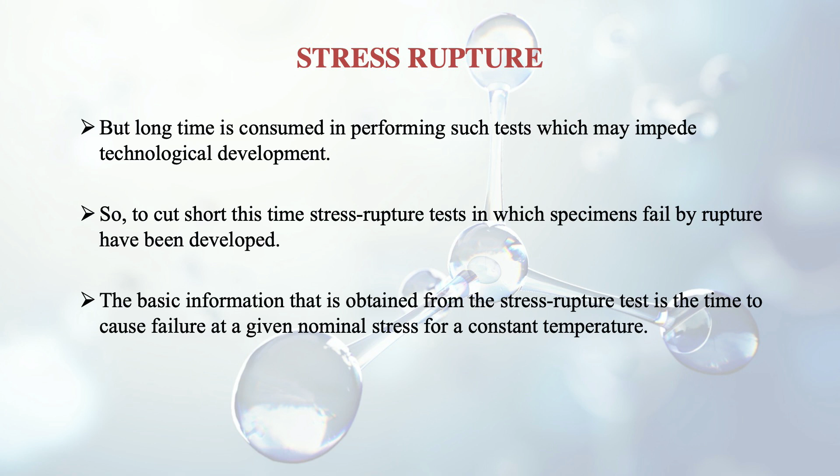The basic information obtained from the stress rupture test is the time to cause failure at a given nominal stress for a constant temperature. So we keep the temperature constant and then we see at what nominal stress the material is going to fail. The stress rupture curves are obtained by plotting rupture stress against time of rupture.

The strain at rupture can be as high as 50%, and the time required may not be more than 1000 hours. So we see here that the time has lessened, so we can perform this test much more easily as compared to the creep test, which was taking around 10,000 hours earlier. The results of such tests can be directly used where creep deformation is tolerated but fracture is to be prevented.

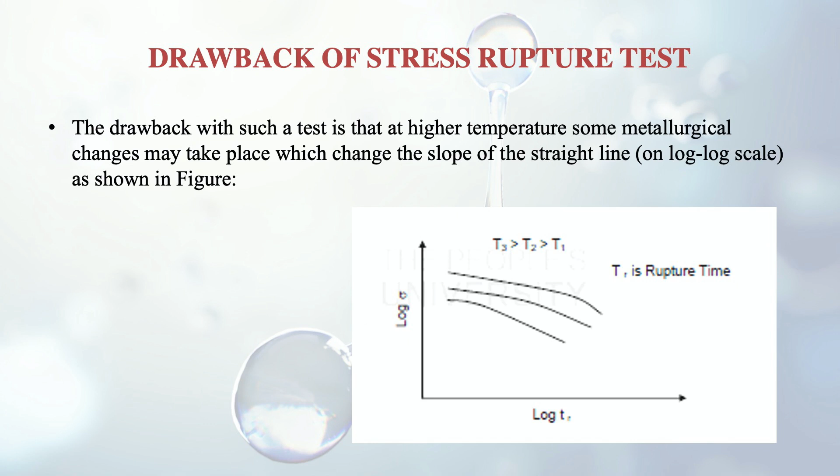So now we further discuss creep and rupture strength. Creep limit as such cannot be defined, like we had the endurance limit in the case of fatigue. There is no limiting stress at which creep does not take place. So we cannot say that below this level of stress creep will not occur. It is not that kind of phenomenon.

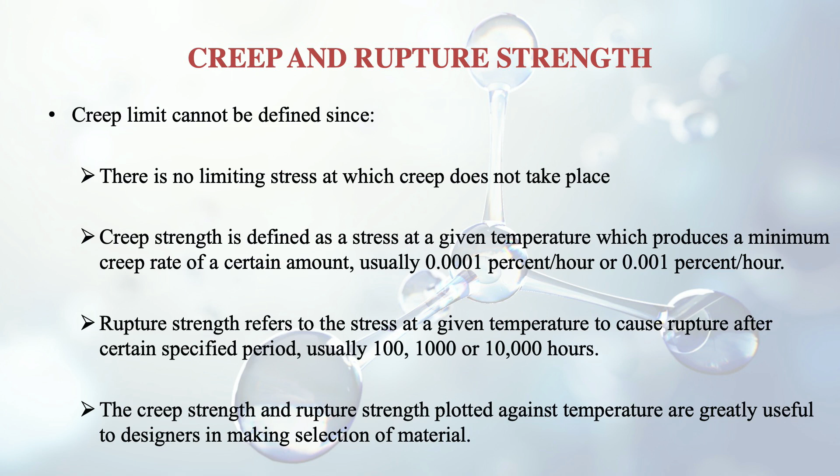Creep strength is defined as the stress at a given temperature which produces a minimum creep rate of a certain amount, usually 0.0001% per hour or 0.001% per hour. Rupture strength refers to the stress at a given temperature to cause rupture after a specified period, usually 100, 1000 or 10,000 hours. The creep strength and rupture strength plotted against temperature are greatly useful to designers in selecting materials.

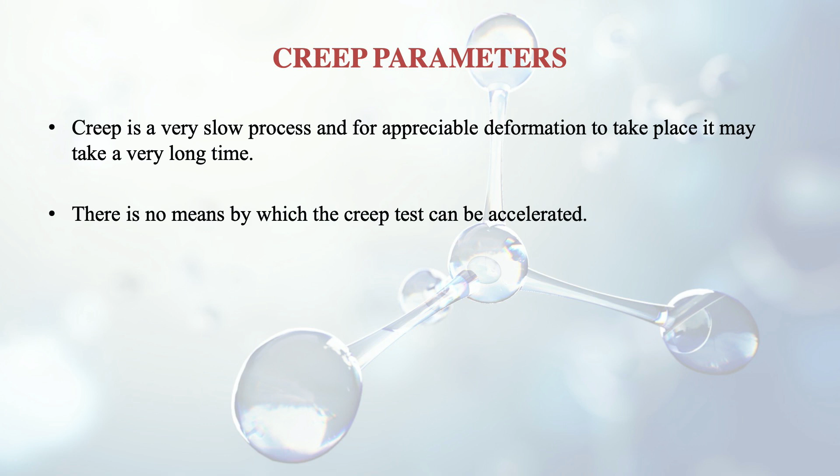So there are certain creep parameters. Creep, we know, is a very slow process, and for appreciable deformation to take place, it may take a very long time. There is no means by which the creep test can be accelerated. But technological development cannot wait for assimilation of data on a new material. Suppose we have to use a new material and we don't have the creep properties, then we cannot wait for years. So methods to predict long-term creep behavior by making use of short-term tests are very much required.

So we have to do short-term tests and then extrapolate. There are certain methods which depend on the extrapolation of data. We do short-term tests and then we go for the long-term ones with the help of the extrapolation of the data.

So in this session, we came to know about the phenomenon of fatigue, its mechanism, and various high temperature resistant materials, why they are required, and the creep phenomenon. Because we require high temperature resistant materials, we went into the creep phenomenon as well. So these were the things that were discussed, and further we will discuss in the upcoming lectures.